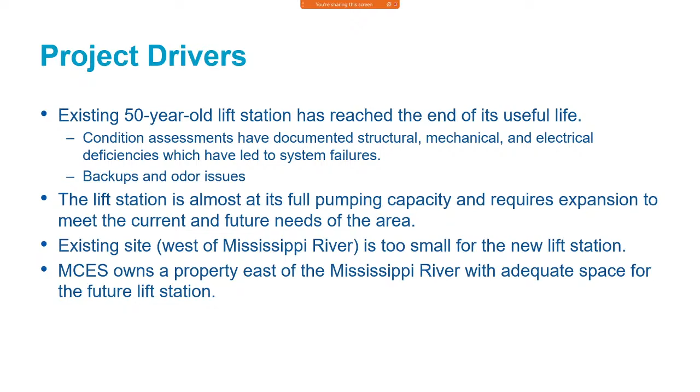The lift station is almost at full pumping capacity, so we need to expand to meet the current and future needs of the area. Our existing site on the west side of the Mississippi River is simply too small for a new lift station. We do have a new site, a property east of the Mississippi River in the city of Fridley, that is adequately sized for a new facility to meet our needs for the future. Next slide, please.

As a reminder, the red dot in Brooklyn Park shows where our existing facility is at the end of Mississippi Lane. The orangish dot is our future lift station in the city of Fridley, on a parcel about 22 acres that we own in the city of Fridley. We will build on the southern portion of that facility in close proximity to our existing force mains. Next slide, please.

Our project schedule: we've been working on this for almost a year now, starting with our public hearing that we held back in December of 2020. We've submitted our facility plan to the Pollution Control Agency and had that approved in May of this past year. We're moving forward with starting design of the lift station project next month, October of 2021. With that design, we're aiming for completion in 2022, beginning construction in 2023, with project construction completed around 2026. So I think we're still moving forward with that schedule that we've been sharing with you for quite some time. Next slide, please.

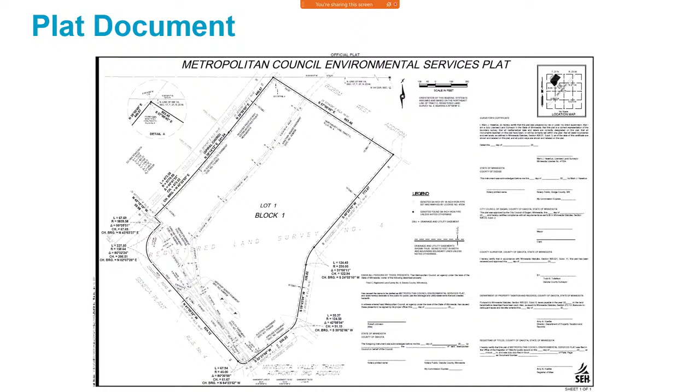Next slide, please. So with that, the proposed action this afternoon is that the Metropolitan Council authorizes its regional administrator to sign the final plat for the Metropolitan Council Environmental Services plat located at 3565 Kennebec Drive, Eagan, Minnesota, 55122. Next slide, please. I can be available for any questions you may have.

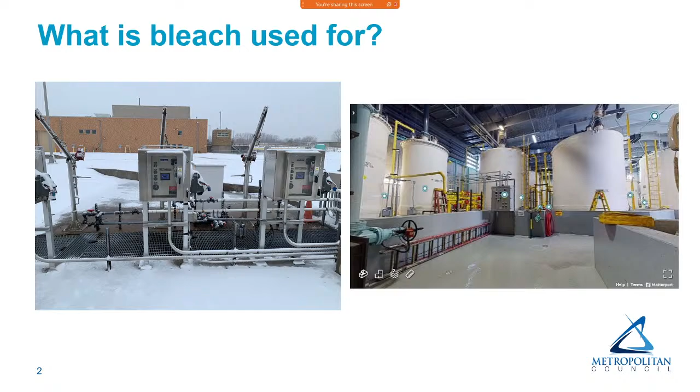So bisulfite then is a little bit different, but it is used in addition to the disinfection process, to dechlorinate the process. Essentially bisulfite is used to remove any remaining bleach that might be within our wastewater effluent stream so that it is no longer harmful to aquatic life downstream in the receiving water that we discharge the wastewater effluent into. Similarly to bleach, bisulfite as part of the dechlorination process is required as well by the Minnesota Pollution Control Agency during those same exact months from April through the end of October. Next slide, please.

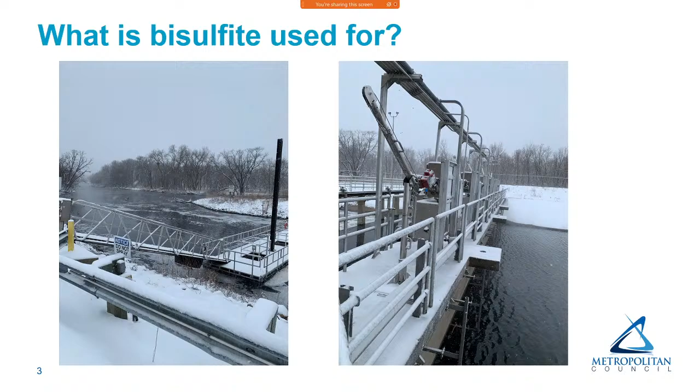To provide a little bit of background and to remind you all of this bleach and bisulfite contract, this was brought in front of the Environment Committee as part of an approval for an emergency declaration in February of this year. The existing chemical supplier, DPC, left the distribution area that we are a part of. They essentially sold their chemical equipment and company and left our region. At that point, we came to the Environment Committee to get approval for an emergency declaration to allow us to continue to properly disinfect and dechlorinate our wastewater effluent while we went through an appropriate invitation for bid process. That IFB process has been completed.

We've advertised, we've had a public bid opening. The results of that public bid opening were 2 bids received for bisulfite chemical and 1 bid received for the bleach chemical. The lowest responsive and responsible bidder was Hawkins. This is a 2-year contract with 2 optional 1-year extensions.

Next slide, please. So with that, the proposed action tonight is that the Metropolitan Council authorizes its regional administrator to award and execute contract 21P122 with Hawkins Incorporated for bleach and bisulfite supply for a total award not to exceed $5 million, $5,400,000. Next slide, please.

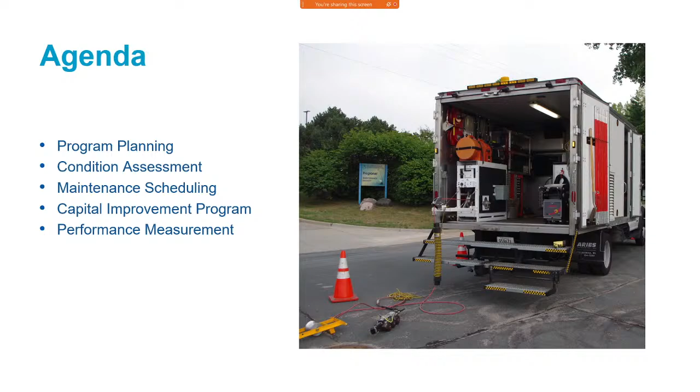So the first two items on the agenda are program planning and condition assessment. And undeniably, condition assessment drives nearly every aspect of our work within the Interceptor system. Certainly condition assessment and program planning go hand in hand. A potential trap of any utility is that you can't get ahead of problems because you're always responding to problems rather than keeping up on your review of system conditions. We've always completed condition assessments in the Interceptor system.

But in 2019, we formalized an internal process for defining when, who, and how condition assessment information is processed for our gravity interceptor pipe, and the follow-up task that we take when we find deficiencies in the system.

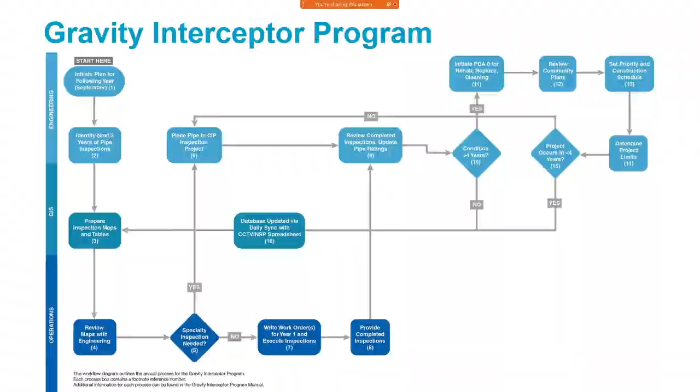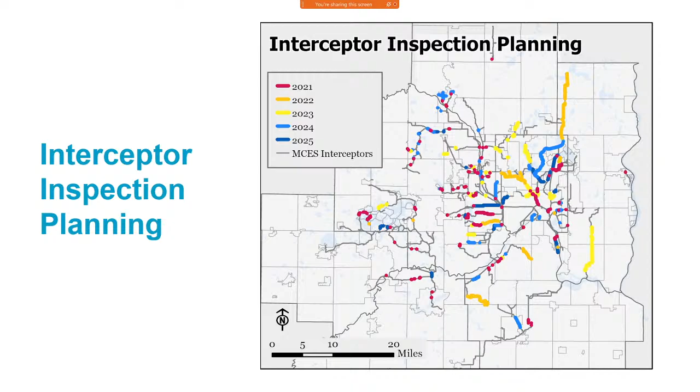Through the process of inventorying the previous inspection dates, we have identified a schedule cycle for contracting assessment work through the capital improvements program. Contracting assessment work is necessary where we're not equipped to handle a larger diameter pipe or deep tunnel installations with our existing equipment in-house at ISBU. Understanding the upcoming goals for both in-house and contracted inspection work allows us to better budget and plan for these activities.

With the full implementation and success of the Gravity Interceptor program in 2020, we're turning our sights to other asset classes. We're on track for 2021 to finalize programs for cathodic protection, meters, siphons, and force mains, and we're looking to complete programs for lift station and odor control in 2022.

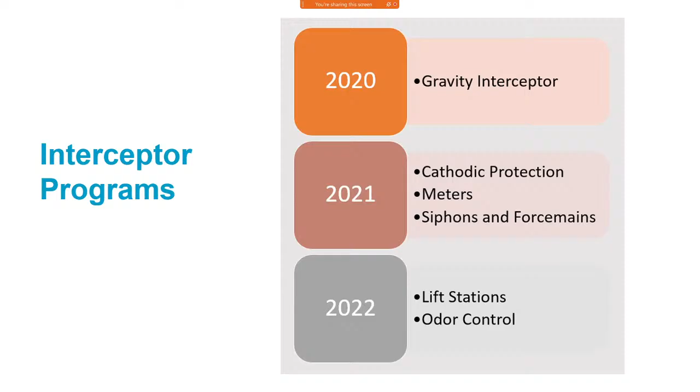Adam, can you give me a quick reminder on cathodic? Good question, I was wondering if somebody would ask that. Not too many people are familiar with that.

Cathodic protection is the method we use to protect metal pipe. So if we have, say, some ductile iron pipe that we are burying in the ground, sometimes we will use current to actually protect that pipe and put a charge on it that will prevent corrosion. You also will find that very common within our transit group. That's how they protect the rails on the LRT, as well as many parts of tunnel work.

Fascinating, thank you. Yeah.

On the engineering side of the table, these programs are very important in being able to identify and prioritize new projects for the capital improvements program. Any interceptor rated as a 4, which equates to a poor condition pipe, or greater, is entered into the capital improvements program.

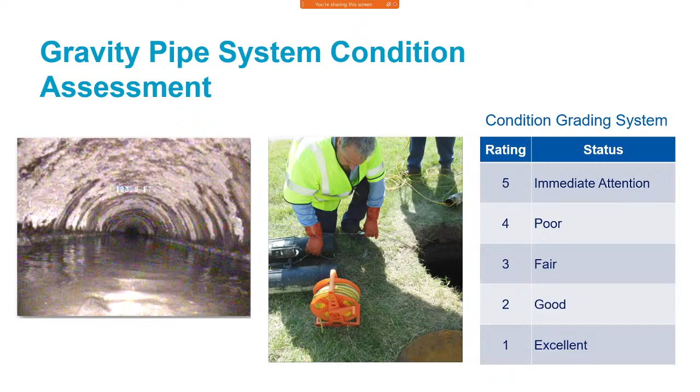And with that, I'm going to turn it over to Bert Tracy. He's going to review some of the things that go on in-house. If we still have Bert on the line. Thank you, Mr. Chair and committee members, apologize for that.

As Adam stated earlier, with the full implementation of the Gravity Interceptor program in 2020, the 2020 CCTV footage goal of 308,000 feet was an alignment year based on the information gained through establishing the new program. Staff did an outstanding job meeting that record high of 308,000 feet for in-house CCTV inspections. However, by meeting that lofty CCTV goal, that caused ISBU to defer other inspection work that crews would normally have performed.

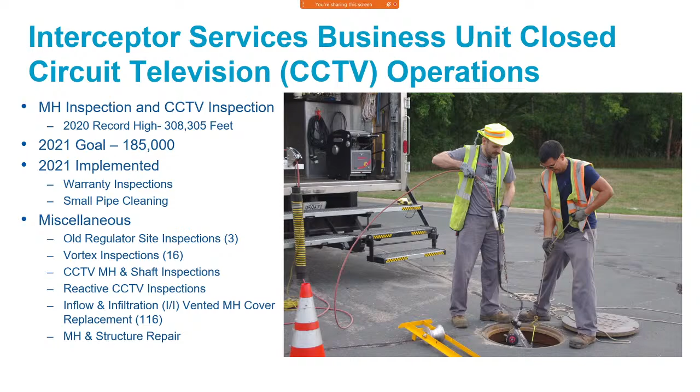In 2014, ISBU began utilizing the new work order and asset management system known as WAM.

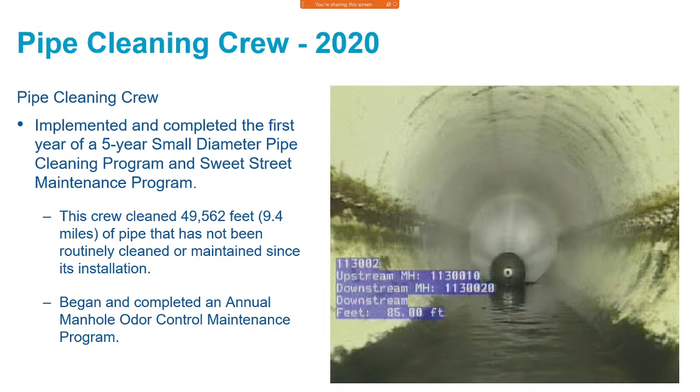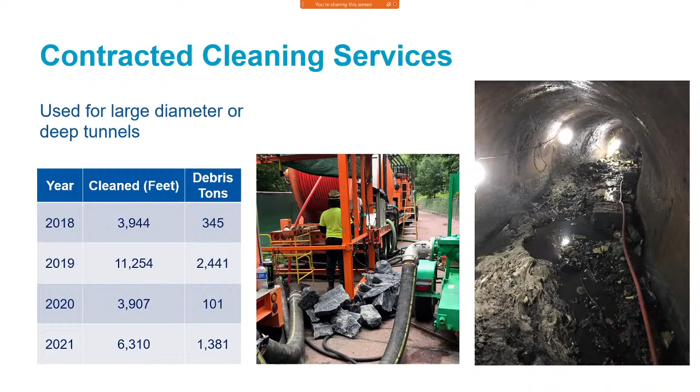This picture is of one SP200 from 2 seasons ago. ISBU and Wastewater Planning and Capital Project Delivery work collaboratively on determining when to utilize contract cleaning services. The rule of thumb is when the pipe size, depth, and flow exceed in-house cleaning abilities, the business units work together on determining critical areas to be cleaned. The determination is also based on our consultant's assessment of debris buildup in the pipes.

This picture in this slide is a pump from L77 in Woodbury. That's what we'd call flushable wipes that are supposed to break down in the sanitary sewer system. As you can see, they don't quite break down like they're sold to do.

Councilmember Wolf, this picture was for you. I remember when you requested one.

ISBU is supported by the maintenance business unit's trades, made up of machinists, electricians, and mechanics. The trades completed 3,715 work orders in 2020. Of those work orders, 47% were preventative maintenance. And of that 47%, 379 were designated with project class to improve process and equipment and/or safety. This equates to a 10% improvement in ISBU systems.

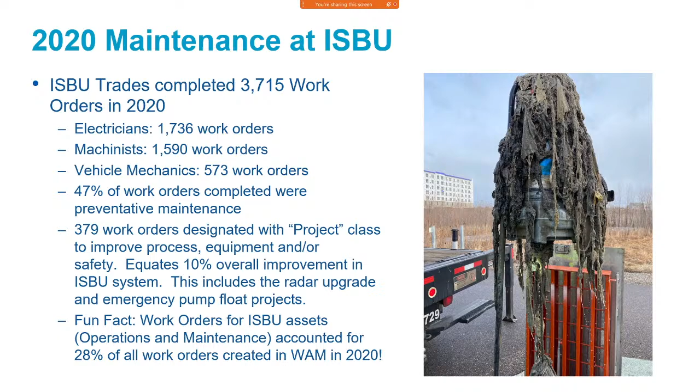Interceptors are defined or identified as condition 4 or worse and entered into the capital improvements program. With the implementation of the gravity sewer inspection program in 2020, we identified 14 interceptors with condition rating 4 or 5, totaling about $36 million in new work.

This slide shows 2 of the interceptors, near the same location in Shakopee, just south and west of the Blue Lake wastewater treatment plant. On the right you can see an indicator of poor condition pipe, which is a loss of concrete due to corrosion from inside the reinforced concrete pipe. The corrosion is caused by H2S, and it's so corroded that the steel rebar is visible.

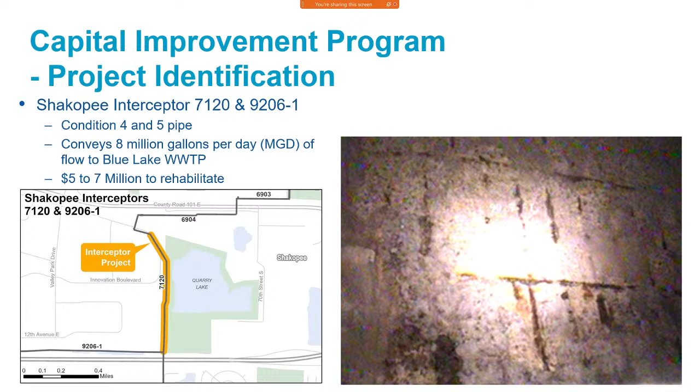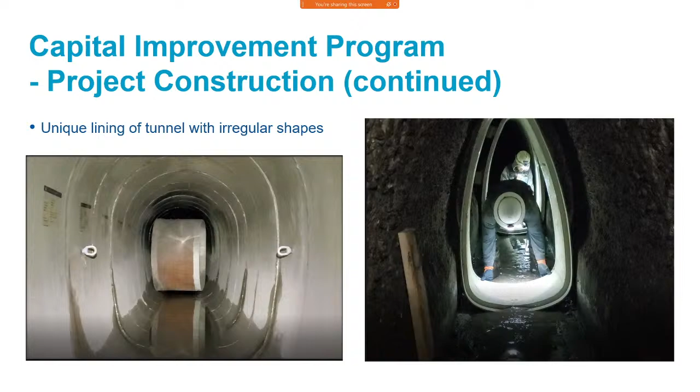And with that, I'm going to turn it over to Bert for the next slide.

In 2019, ISBU created and implemented 3 large maintenance programs that were launched in 2020: the small diameter pipe cleaning program I mentioned earlier, 2020 CCTV, and upgrades of lift stations. We also did sewer meter SCADA system communication modems.

The 3 program setups forced the creation and cancellation of reactive work orders, which are now maintenance benchmarks for the sewer cleaning and CCTV programs as we move forward. Staff and the management team worked together on refining our maintenance PMs to include better and more precise information, continuing to make the PMs more effective. As PM work order numbers go up, we continue to see a decline in reactive work orders. By finding deficiencies before they occur, PMs, while increasing in number, are generally performed at lower labor cost hours versus corrective maintenance, or CMs, which increases efficiencies and reduces maintenance costs over the life cycle of the asset.

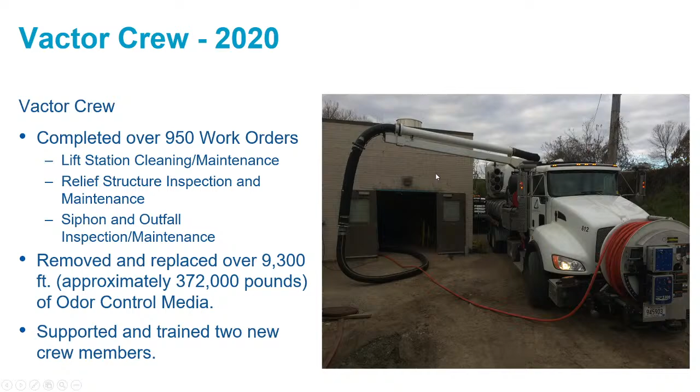I've been with the council now for a solid four years. I know they did CCTVing before that, but I'm not sure what kind of footage they did. I might be able to find it if I dig hard enough, but I'm not sure where to look. That's a very good question. I wish I had a good answer, but I do not.

I don't expect you to dig for it. Thank you. Actually, I started on the council in 2009, and that was kind of an inflection point because we hadn't been keeping up with enough televising to really know the condition of our entire system.

It wasn't enough to get through the whole system in a timely manner to know what the condition of the entire system was. So there was a change at that point to make sure we were actually checking all of our own stuff, in addition to requiring cities to check their stuff as part of the I&I program. So that's why I was wondering what it was like before in numbers. I know it was less, but I don't know how much less.

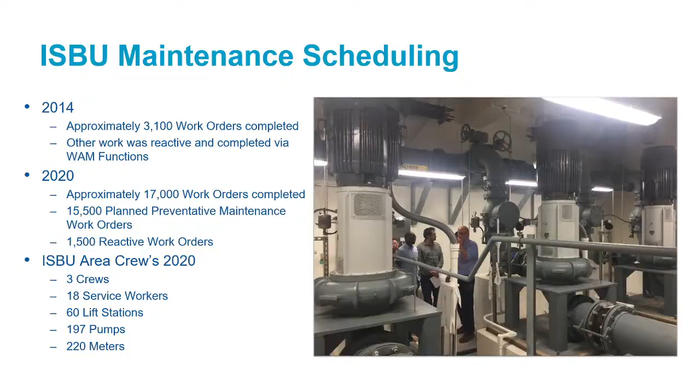But thank you. Chair Wolf, again, I wish I could answer that for you, but I know we keep improving and working with wastewater plant capital delivery. The teamwork we have is really working out really well for ISBU and the council. I really appreciate that. Everything we have asked of staff over the years, you guys do, and you do a great job of responding to the needs. So thank you. You're welcome.

Any other questions, comments? Then we would move on to the next agenda item, which would be chloride impacts with Deborah Manning.

Thank you, Madam Chair and council members. Thank you for the opportunity to talk with you today. In this presentation, I will cover chloride impacts to surface water bodies, groundwater, and wastewater treatment plants, including reuse. Again, my name is Deborah Manning. I am the Assistant Manager in Plant Engineering and Wastewater Planning and Capital Project Delivery.

And first I want to say, what is chloride? Chloride is the anion Cl-. It forms when chlorine gains an electron, and it combines with other elements to form salts, such as sodium chloride, which is table salt. Salts are commonly used as road salt and to regenerate water softeners. Chloride forms different kinds of salts, and they dissolve very easily in water.

Once in water, the chloride doesn't break down or go away. Chloride persists, and at high enough concentrations it's directly harmful to aquatic life, and it disrupts a process in lakes called turnover, which leads to other harmful impacts. So at the conclusion of this presentation, I hope I will have demonstrated that the time to start working together to manage chloride is now. Next slide, please.

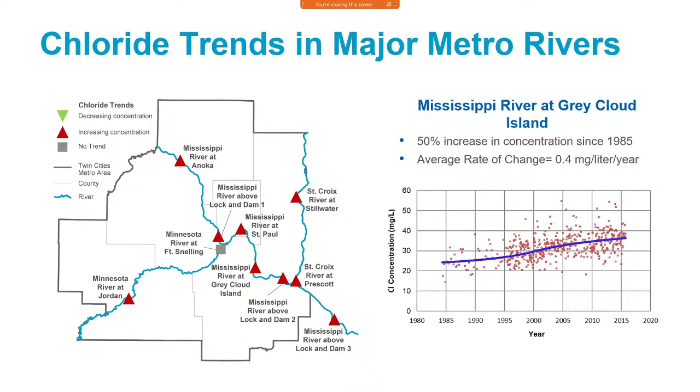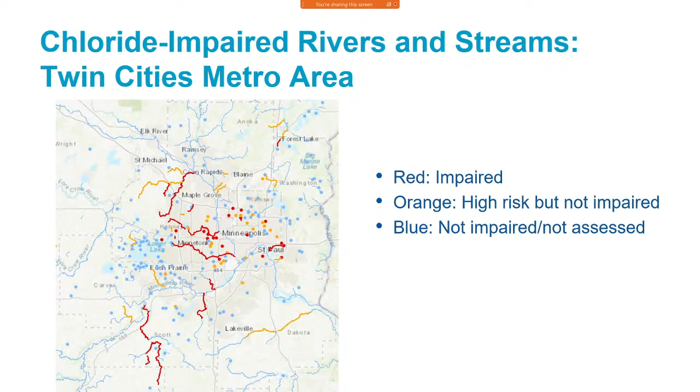Our lakes and streams are becoming poisoned with chloride. Next slide, please.

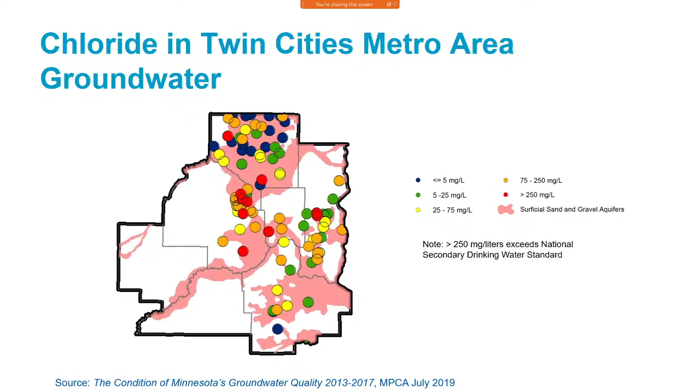For perspective, a chloride concentration of greater than 250 milligrams per liter exceeds the national secondary drinking water standard for chloride, which is set because that level of salt leaves a salty taste in the drinking water and can also be a problem for people with certain health conditions. So we're poisoning our wells with chloride as well. Next slide, please.

Fortunately for MCES, our wastewater treatment plants discharge to large rivers that are not impaired for chloride. And even though the chloride concentration in the 3 large metro area rivers is increasing, the concentrations aren't yet at the level at which we face a regulatory requirement to reduce chloride in our effluent. But even though this is the case, we aren't ignoring the chloride issue. We are preparing to manage chloride in ways that make sense. Next slide, please.

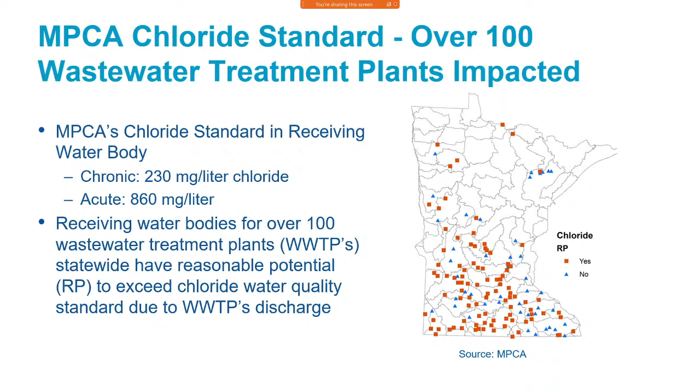Managing chloride has significant challenges because chloride does not break down. The best treatment does is just separate the chloride from the rest of the water. The technology to do this, typically reverse osmosis, would be a totally new treatment process at MCES's wastewater treatment plants. And it would be, frankly, technically infeasible for our large plants. That's because it produces a reject water in which the chloride is concentrated, so it's a brine, for which there is no feasible disposal option in the Midwest.

Given all this, controlling chloride at the source is the best option. Next slide, please.

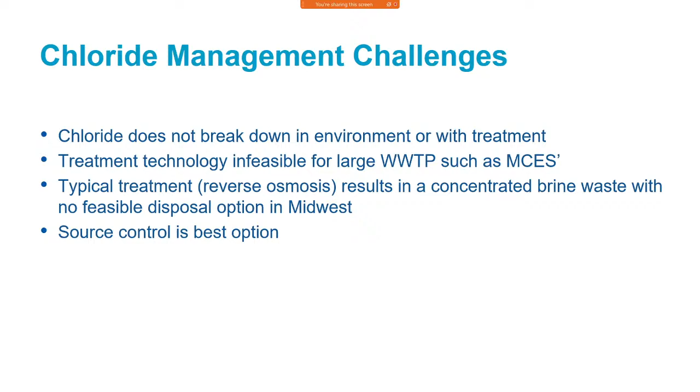So what are the sources of chloride to wastewater treatment plants? This pie chart shows a typical wastewater treatment plant effluent in Minnesota. 49%, the deep blue part of the pie, is from household water softening. 16%, the light blue part, is from commercial water softening. And 22%, the yellowish part, is from industry, a large part of which is industrial water softening. So an estimated 87% of the chloride coming to a wastewater treatment plant is mostly from water softening.

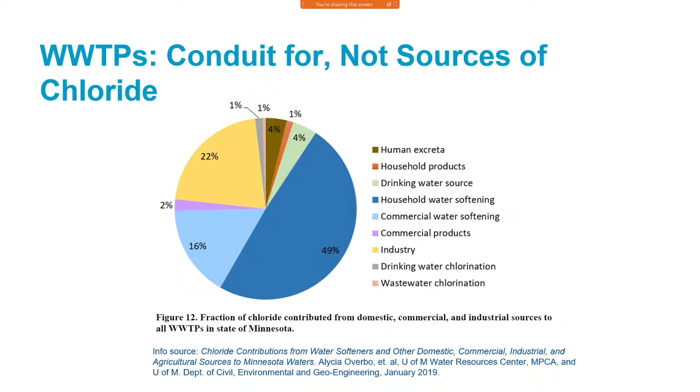How does the type of water softening used in households, commercial entities, and industries result in chloride? These sectors use a softening technology called ion exchange, and ion exchange softeners have to be recharged on a regular basis, and salt is used to recharge the softener. The salt eventually comes off of the softener and into our wastewater as the sites in the ion exchange softener get used up.

Despite the chloride entering MCES's wastewater treatment plants from upstream sources, and despite that amount tending to increase, we don't foresee chloride limits in our discharge permits from our wastewater treatment plants in the foreseeable future.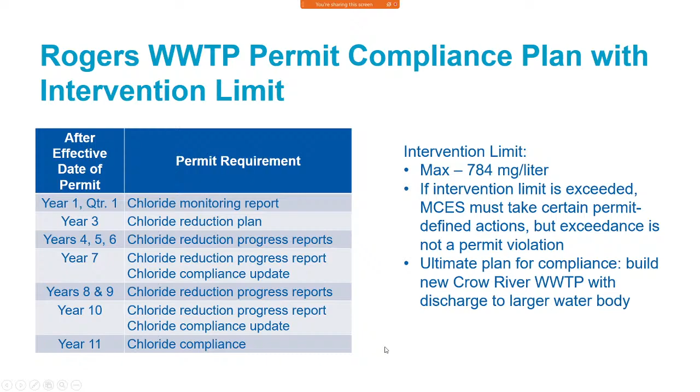Chloride impacts MCES's ability to provide reclaimed water to customers. Wastewater reuse would involve MCES taking water discharged from one of our treatment plants, treating it to a higher level, and providing that water, called reclaimed water, to a user. The reclaimed water produced may have to be treated further by the user for their particular purpose. Chloride comes into the wastewater reuse picture depending on the reclaimed water user's needs.

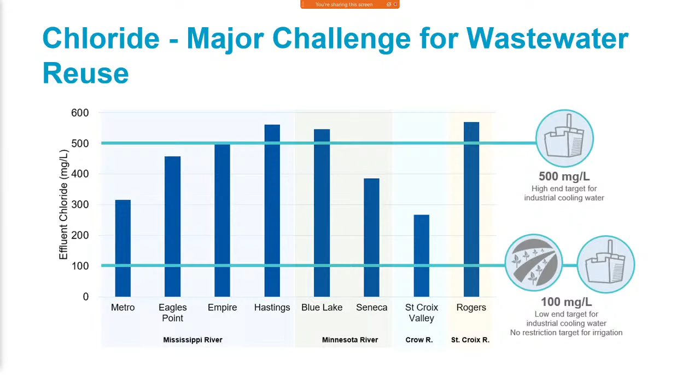MCES sees two possible approaches to managing chloride at our wastewater treatment plants in the future. We could treat to reduce chloride at our plants—this is the end of the pipe approach. This treatment is currently not feasible from a cost or technology perspective, and even if it were, the chloride reduction process results in a concentrated brine for which there is currently no feasible disposal option. The other approach is for MCES and the region's communities, watersheds, and industries to work together to reduce chloride at the source.

For other water challenges, such as phosphorus, mercury, and infiltration and inflow, we've successfully taken this approach and had excellent results. MCES is pursuing the second approach: source control.

We formed an internal chloride team that's been preparing information for developing the 2050 Water Resources Policy Plan, which will have a section on chloride and chloride management. We are looking to the Environment Committee and that advisory group for the policy plan to help us set some strategy for chloride reduction. Ultimately, we will draw on the region's success with other source control initiatives to collaborate with the region's communities, watersheds, and industries to reduce chloride at the source.

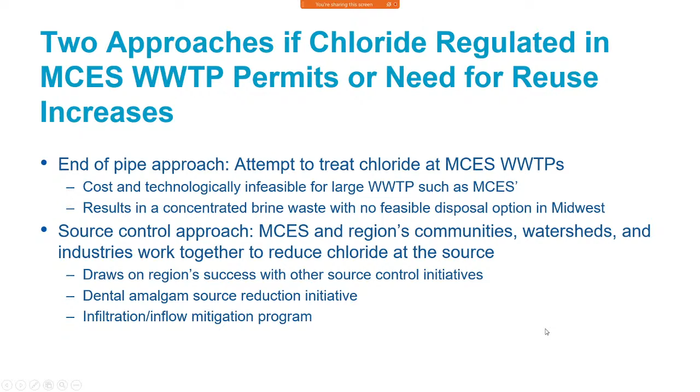The team's charter includes some outcomes: to prepare MCES to lead in building understanding about chloride issues and develop chloride reduction strategies by collaborating with regional customers and stakeholders, to prepare for the chloride section of the 2050 Water Resources Policy Plan, and finally, to resolve how to address requests from communities and industries about MCES receiving salty discharges.

To date, the internal team has developed details about chloride reduction concepts at our wastewater treatment plants and by source control, and costs for those concepts. The source control alternatives we've explored include water softener improvements and municipal softening alternatives.

Municipal softening involves water treatment plants installing processes that don't result in a chloride load to wastewater treatment plants. MCES is collaborating with the City of Robbinsdale on a study as they install municipal softening, looking at before and after that plant goes online, what the impact is on chloride in our wastewater. We're also collaborating with the City of Rosemount on ways we can overcome chloride challenges related to wastewater reuse.

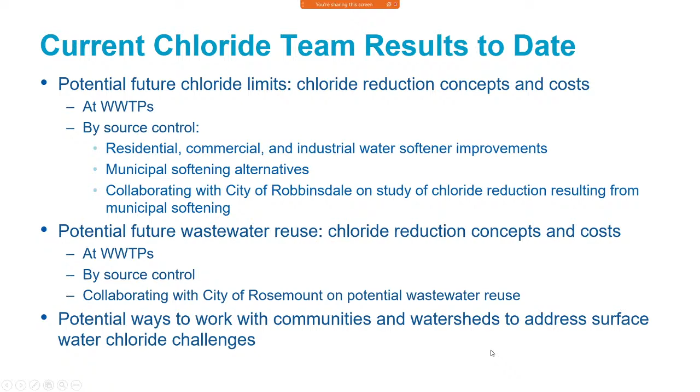In conclusion, chloride is found in commonly used products such as table salt and road salt. It dissolves very easily in water, and once in the environment, chloride does not break down and is toxic to aquatic life and disrupts normal lake processes such as turnover. Chloride concentrations are steadily increasing in metro area rivers, streams, lakes, and shallow groundwater.

Because of these increasing trends and negative impact on aquatic life, the MPCA set water quality standards for chloride. Wastewater treatment plants are conduits for, not sources of, chloride, so source reduction is the best option for managing it. Chloride effluent limits in MCES's wastewater treatment plant discharge permits are not anticipated in the foreseeable future.

However, the Rogers plant discharge permit includes an intervention limit and a requirement for a chloride reduction plan. Chloride is also very challenging for wastewater reuse.

MCES is getting ahead of the chloride issue because reducing chloride at our wastewater treatment plants would be technically very challenging, extremely expensive, and would result in a concentrated brine for which there is no feasible disposal option.

Source reduction would involve partnerships with local water providers, and MCES is preparing for stakeholder engagement with these potential partners. Chloride will be one of the issues addressed in the 2050 Water Resources Policy Plan, and we anticipate outreach to stakeholder groups about that.

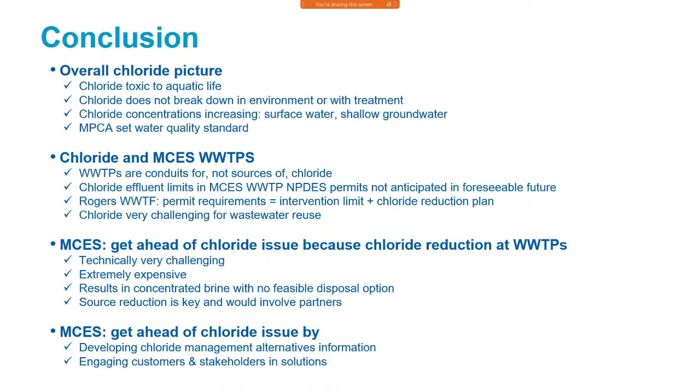For next steps, the chloride team is finalizing and reviewing the results and recommendations with ES leadership. The team anticipates presenting final results to the Environment Committee after the internal review, and then the results would be available for the policy plan team to use.

MCES understands that chloride impacts all water sectors, that chloride management is challenging, expensive, and pushes the limits of technology, and that we need to work together with customers and other stakeholders. We've been applying staff and financial resources to the issue and collaborating to develop solutions, drawing on past experiences solving costly and complex water challenges. The time to work together to manage chloride is now.

That completes my presentation. I would be happy to respond to comments or questions.

Thank you, Ms. Manning. Are there any questions or comments? Oh, Susan, I see you have your hand up.

Thank you, Madam Chair. Deborah, thank you so much for this presentation. It's excellent. As distressing as it is to think of the impact that chloride is having, it's good to know that MCES is really focused on this and working hard. I'm curious whether other regions of the country have tackled this that might provide some guidance. I'm also interested in industries that already recognize the challenges with chloride in their products, et cetera. And I'm anxious, as a consumer and user of water and products that may be part of the problem, to know what I can do to make a difference in my personal life. So any thoughts on any of that?